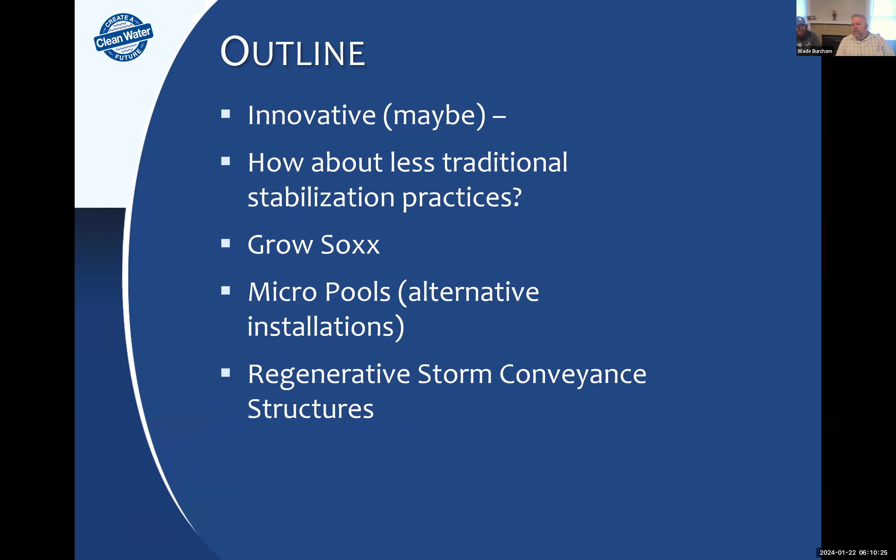A lot of these projects were funded by NFWF from that oil spill money down in Mobile Bay. I'm going to talk about three practices here: Grow Soxx, micro pools, and regenerative stormwater conveyance structures. Again, probably all of you could better present this than I can, but this is probably the thing I know the most about and wanted to present to you all.

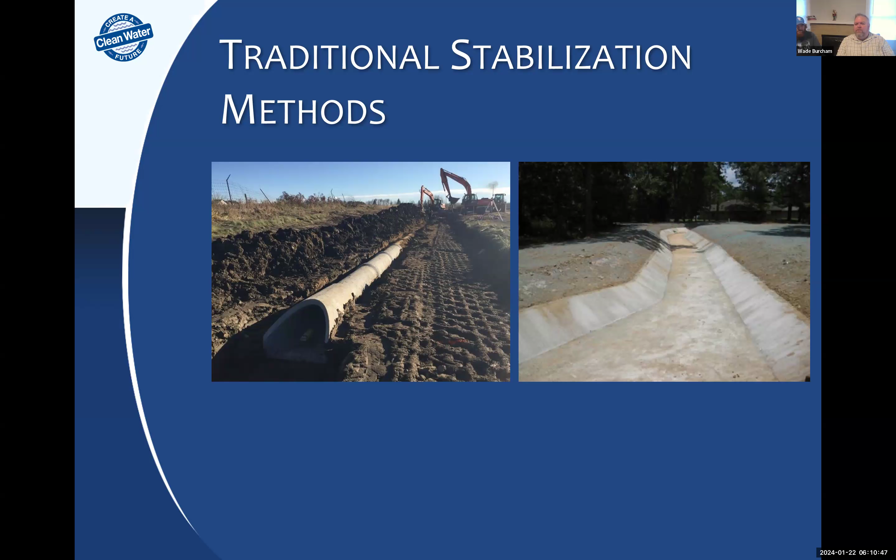We're just trying to contrast this with traditional stabilization methods that we all know - sort of the hard construction that's real strong when you first get there, but it kind of loses strength over time versus a green or naturalized stabilization.

This is a stream, and it looks really green, but there's nothing natural about it. It's at the bottom of about 2,000 feet of 100% paved surfaces, and it drops off into a golf course. In that golf course, they have the stream going around in almost circles - multiple 90-degree bends, absolutely no sediment renourishment from upstream. So this is not natural.

And they had a concrete channel that they took out. They attempted a restoration project. It failed, and so they needed something here that would fit a Corps Nationwide 27 permit, and also snake around their course. It feels like that's a big green area, you got plenty of room, but that was a very confined area due to their requirements.

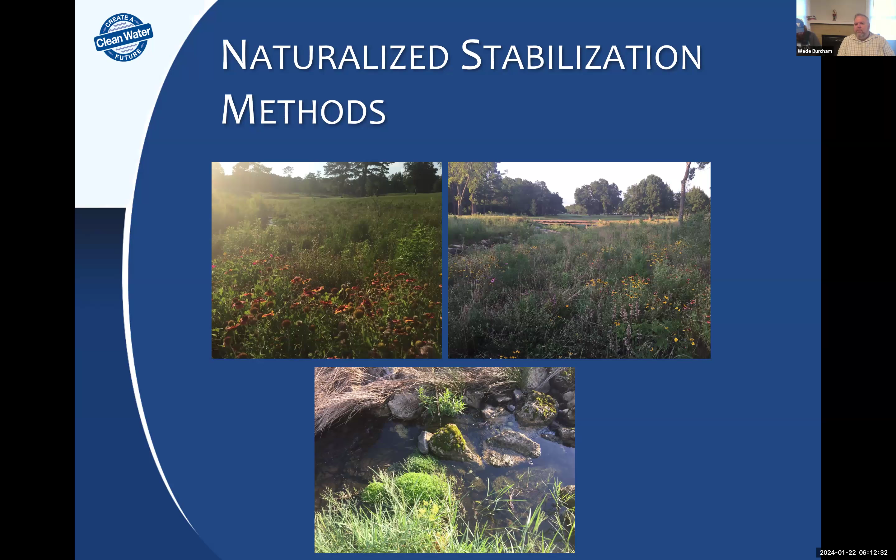And this here again looks green, but there's literally 2 tons of steel holding that thing together right there. This is all turf reinforcement mat, held in place by metal stakes - very extremely high shear stresses here. But it does have that strength of a concrete channel, yet it is more sustainable. There's a floodplain connection, it's regenerative, it grows over time, and it has that aesthetic value too.

So the traditional measures - there's a lot of good reasons to use traditional methods. One of the ones I like most is if there's a problem, it's almost never seen that if there's a failure with a concrete pipe, there's a problem with the concrete pipe, it's not the engineer. The opposite is, if a natural measure has a problem, it's not the product, it is the engineer. Just the opposite.

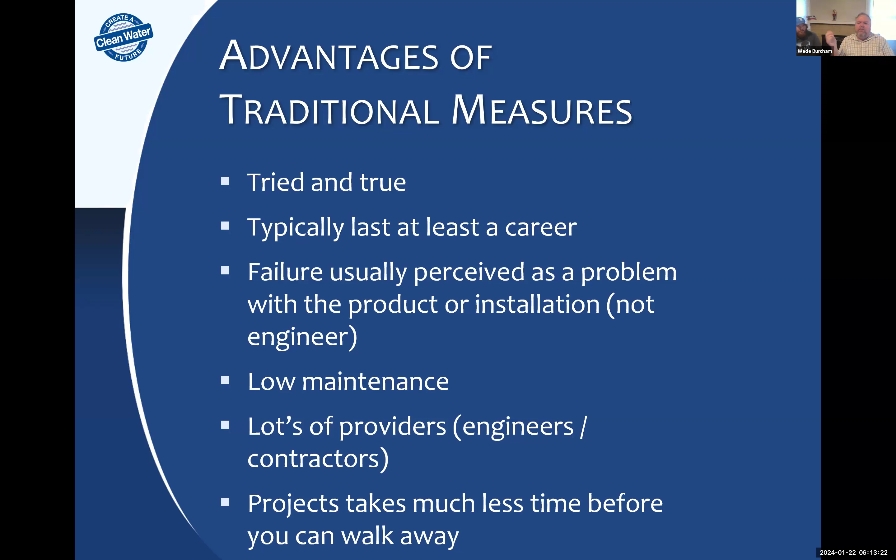And you've got a lot of people that can do these projects, it takes much less time. It's sort of, for me in this area, the standard by which you measure everything else by. So if it costs a lot, that's just how much a project costs. There's nothing to compare it with, and you get kind of a pass on a lot of things.

Some of the disadvantages, as you know, is they weaken over time. They're low maintenance, but they're not no maintenance - a concrete ditch still requires maintenance. I do this other presentation where I ask, is low impact design really low impact design, or is it just conventional engineering? Because most of the time, initial capital costs less, and most of the time it's a more desired product, but they always get you on the maintenance.

So I went around to 4 cities, and I asked them where they did a lot of maintenance - how much maintenance do you put in traditional measures versus natural measures? And I think the quote that really described it all is, hey, we don't maintain our LID infrastructure just like we don't maintain our traditional infrastructure.

So a lot of the places where I'm at, the concrete ditches are falling apart. There's more water that goes under the ditches than above them. There's actually fish that sometimes swim in between the cracks, and they fail. But again, that's not seen as a lack of maintenance - they in fact probably need more maintenance than the others. The previous picture I showed of the golf course, our biggest problem on it was trying to get people not to maintain it.

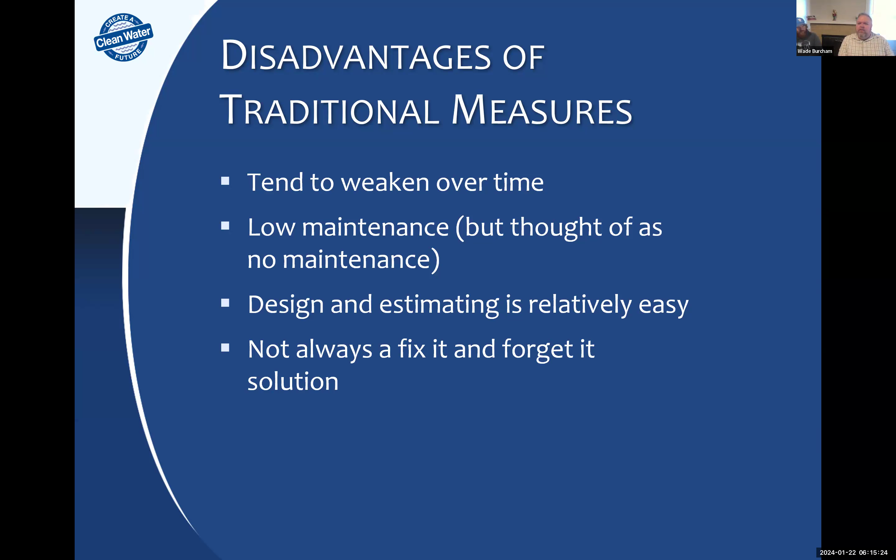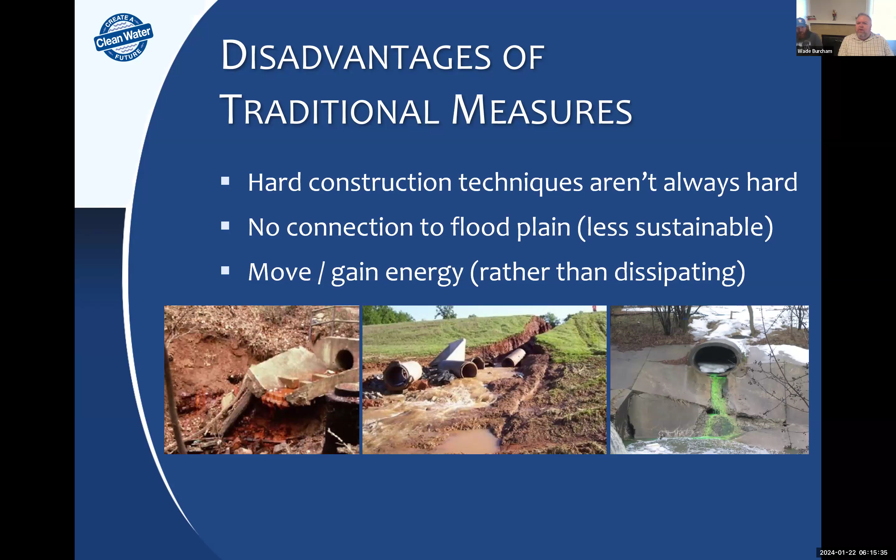They would always want to go in and cut these natural looking areas and make them look industrial. That was echoed by the cities I talked to - just training their staff not to over-maintain these low impact design or natural measures was one of the biggest problems. The traditional thought is that hard techniques are strong, but they're not - they fall apart, while naturalized stabilization measures just get stronger over time.

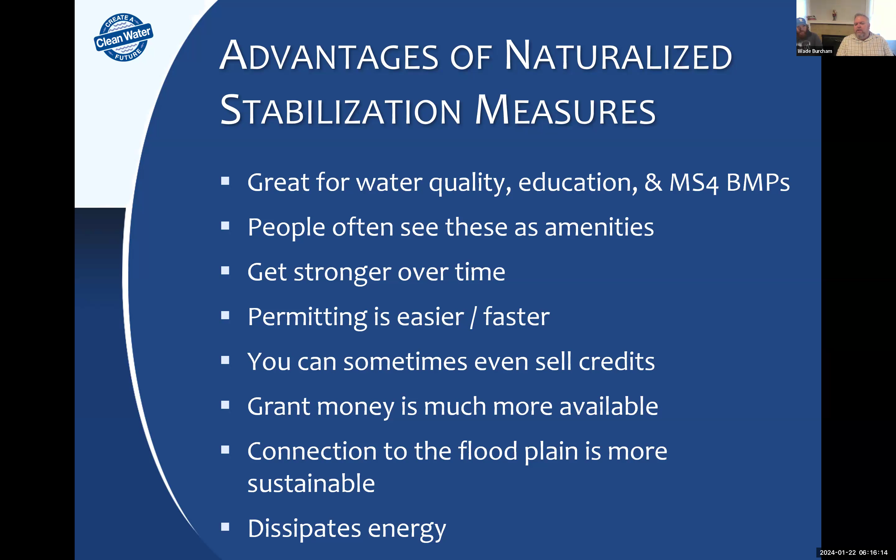You'll see two projects in here that were emergency projects - because of permitting, you couldn't have done these projects in the time frame they wanted unless you used something that would allow a nationwide permit, so that worked out well. They dissipate energy as opposed to creating it, and anytime you can get a connection to the floodplain, it's going to be more sustainable. The first product I wanted to talk about is Grow Soxx.

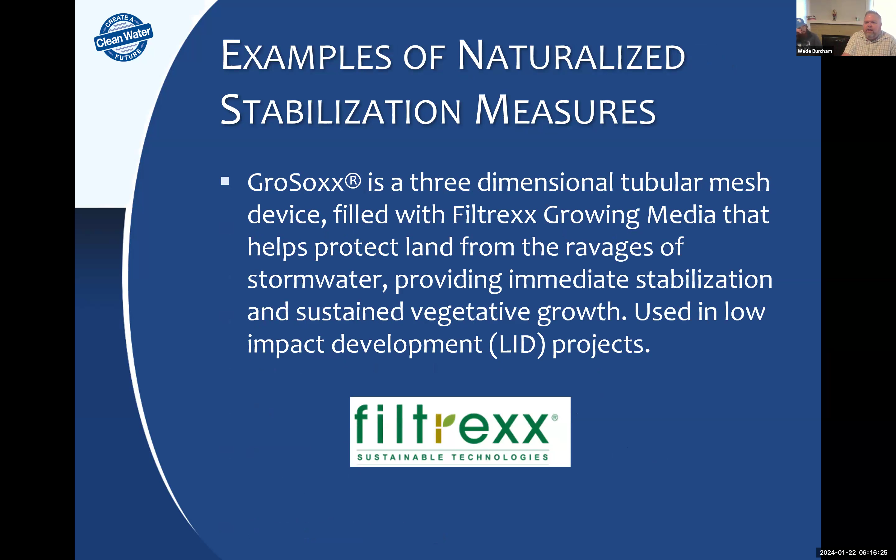It's got a long name, but basically they're just dirt bags - that's what it comes down to. This is how they're sometimes delivered, with the dirt staying in these bags. It's very good quality control - a lot of times they get delivered to the site already growing grass or beginning to, so they sprout up very fast. You can have very good quality control of what kind of seeds you put in there, and you can use these for a variety of different methods.

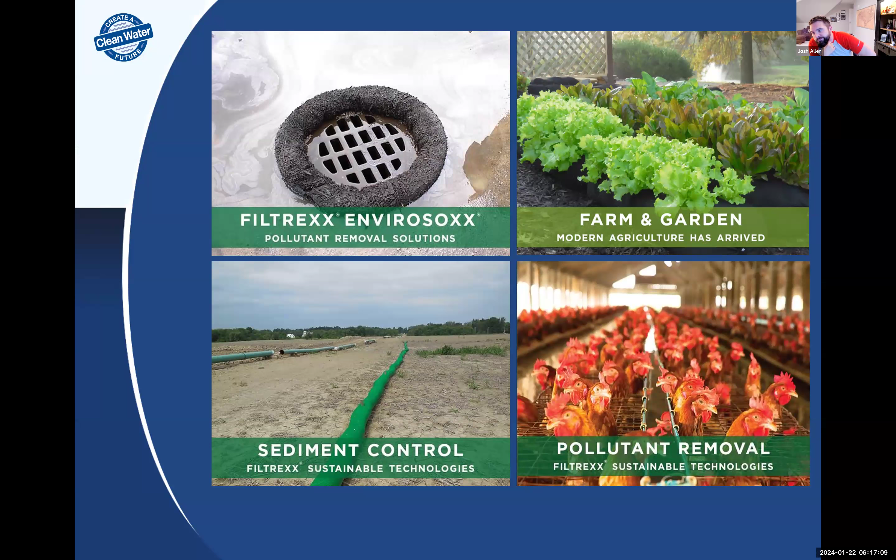Are they biodegradable, or is it like plastic? They're not plastic - the geogrid that goes back in the slope is plastic, just like you'd have in a retaining wall. The bags themselves are a fabric type material, they're photodegradable, so they will degrade over time, but it's a long time. Definitely if you have it in direct sunlight, they'll break down faster.

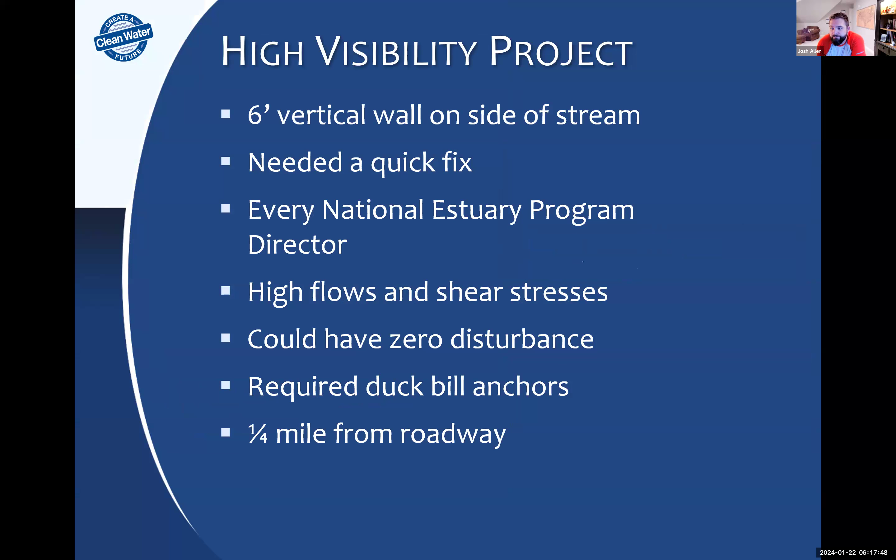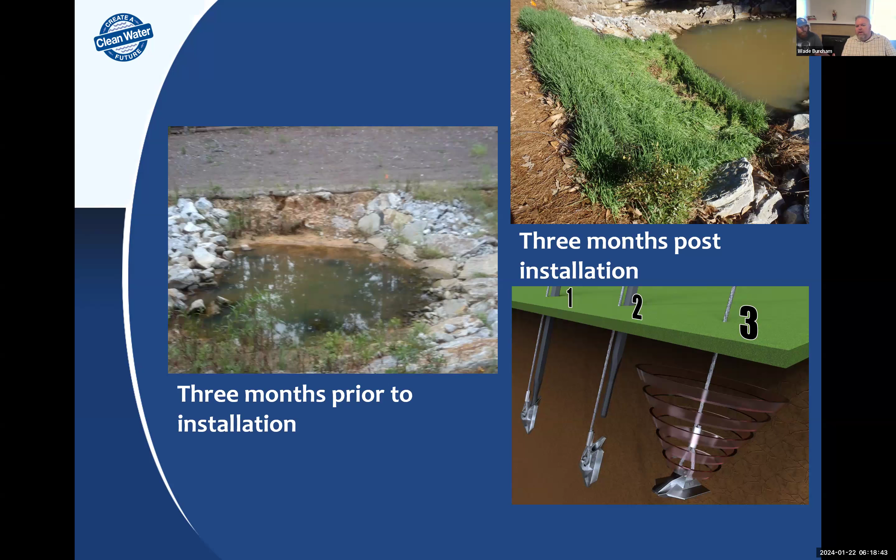This first project was a really high visibility project - just a small area, but we couldn't get it stabilized. This picture doesn't do it justice, but it's about a 6 foot vertical drop, and we had every national estuary program director in the country come visit this site, so we needed something stabilized immediately. We put in these GroSoxx - they describe it as exploding in growth - and we were able to keep them on that vertical slope using geogrid and duckbill anchors to plaster it there. This did stabilize the project, and right after this we had 17 inches of rain in 24 hours from two rainfall events. The roadway to this project washed away, but this project was still there.

This is a non-MSE wall, so if your slope can stand up and you just need stability on the surface, this is one way to do it. Again, you stack those bags in there - you can bring them in by hand, on a four-wheeler, a gator, or something like that.

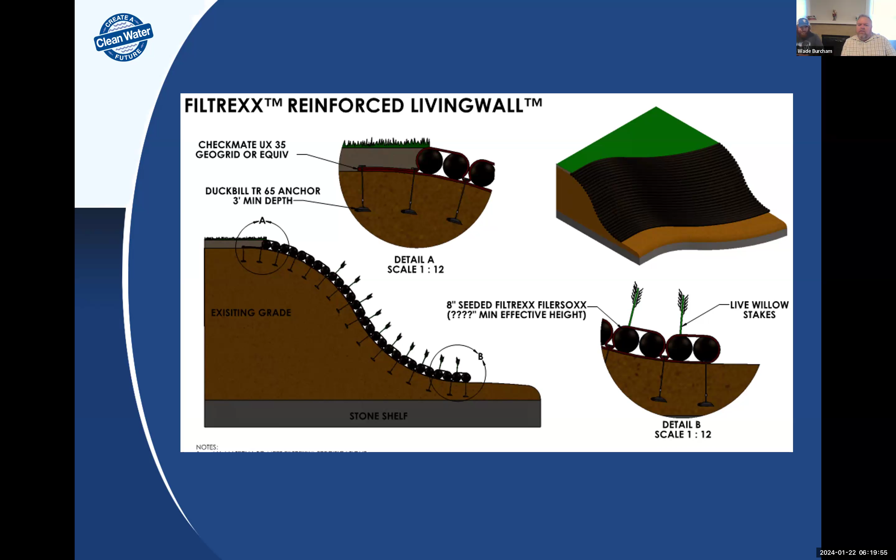Do you fill the bags on site or do they always get delivered filled? You can do it both ways, but on these projects I always get them filled beforehand. Imagine that's a considerable higher cost to have them pre-filled. Yeah, but for me getting good topsoil is nearly impossible, so that's really what you're buying - the topsoil that will stay there. Even if I could fill them on site, I probably wouldn't because I wouldn't trust the topsoil I'd get, but I do have very high trust in this topsoil.

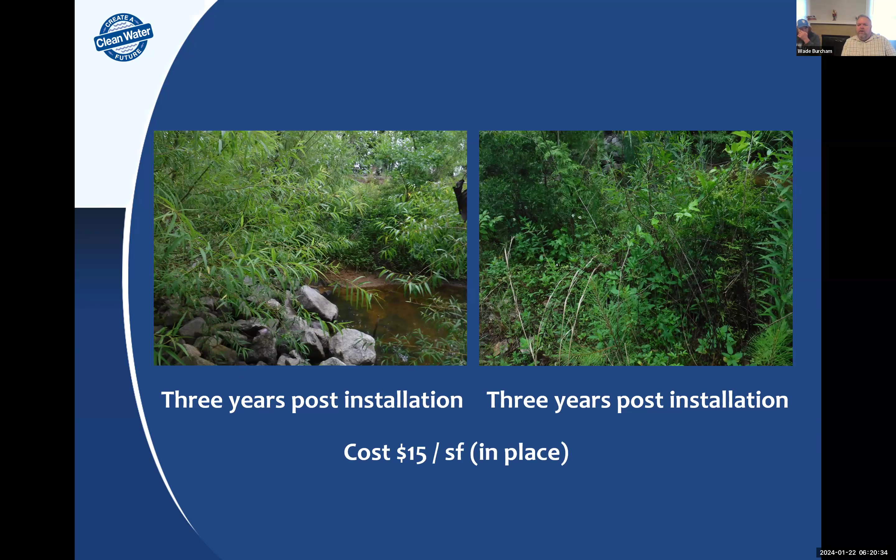So here it is post development - you can't even see the wall there, and in this state it won't degrade over time. You don't have problems with snakes getting stuck in it like some erosion control blankets do, and when it grows up like this it almost works as root reinforcement. This measure was about $15 per square foot face installed. The roots go woody down through it as well as out of it - woody and herbaceous root systems don't affect the integrity of the stabilization. No, it helps it, in my opinion.

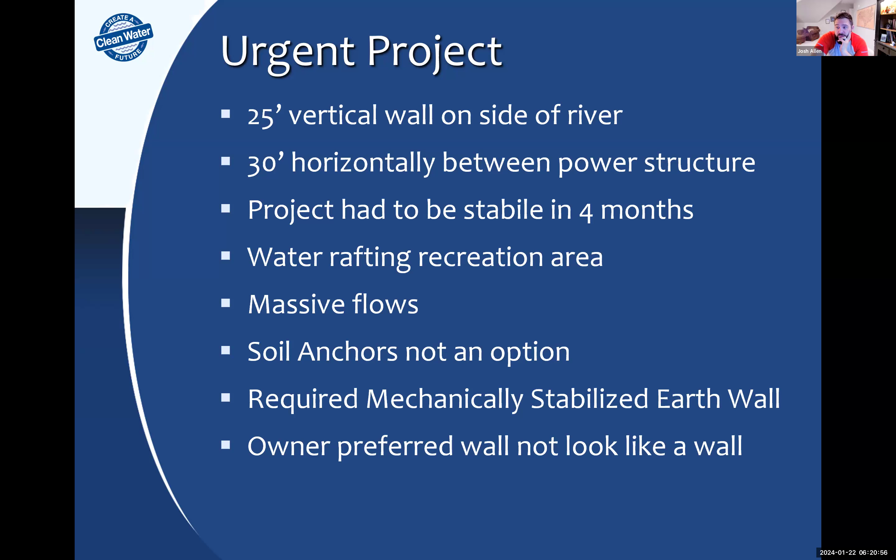Here's another project that was pretty urgent. It was a power structure that they were about to lose, they had taken it down. This was a whitewater area, and interestingly the water here varied by temperature and elevation. On a real cold day, they'd run the dam upstream, and we'd have to get out of the stream real fast.

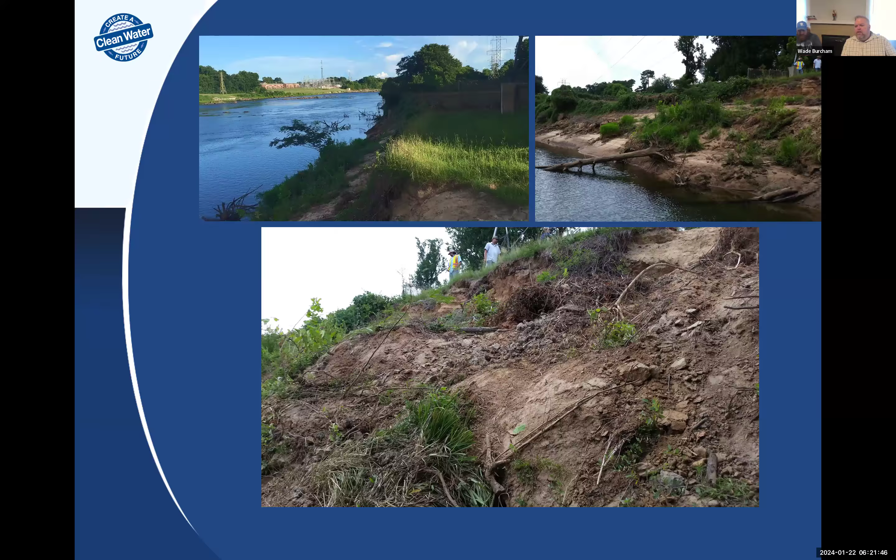This was one where we had two months, start to finish. This was low bid to have this in place. It was an emergency project, and the only way you could do it was either with sheet pile walls or something like these grow socks, and that's what we did. This was low bid, so it was not a stream restoration per se.

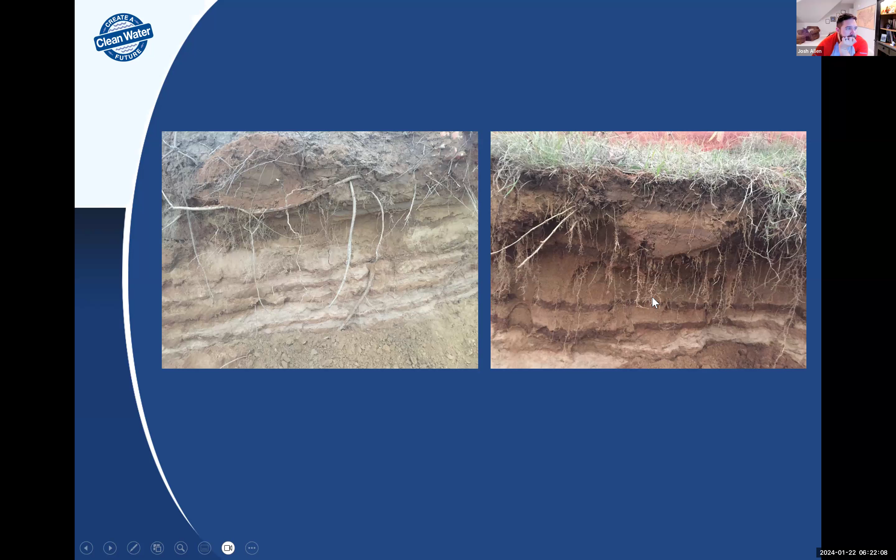Here's what those stream banks look like. Some of the vegetation on the left, you can see kudzu roots, and on the right you can see grass. So there was a lot of invasives, and you can see the difference those grass roots make versus just the tubers that the kudzu makes.

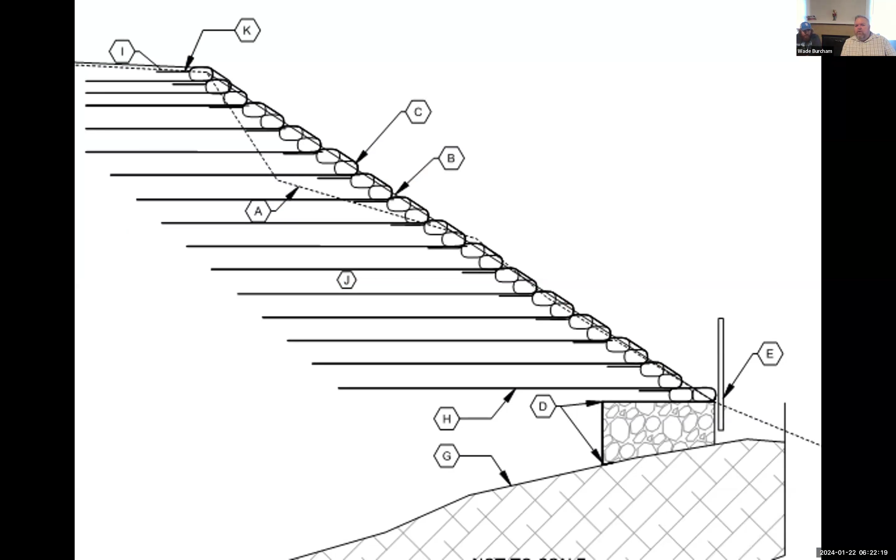Here is the mechanically stabilized wall. It was a near vertical wall, that's sort of exaggerated, but we were able to get it in very fast, and again it doesn't even look like a wall. There's nothing natural about it, but it's kind of got that natural feel to it, it's green.

I had a question - is this the utility's property, or is it someone's property that the utility has an easement on? It's an easement, but their easement is just as well as their property, they can do as they have. So is this power line the same entity that is doing the dam releases?

It is. And they got NFWF funding to fix it, right? Causing their own problem, they got a grant.

Well, what I really like is the NFWF enables them to see, in this treatment way that you present, that it's naturalized and it's trying to be a good steward. It enables them to see, oh hey, this is what we really need to be doing in these cases, and this is the maintenance for putting in and for their operations. This is a good touch point for Wade to bring these stewardship ideas, and this is my whole personal ministry with stewardship, trying to reach out to these different sectors where this is happening. This shouldn't be some small group of mystics around a campfire saying this is how we restore it - this should be something like you're showing, like you're sharing. It might not look like natural stream restoration, but it's certainly something the larger community, someone whose interest is human goods and services, can embrace. This NFWF funding is educating them, so when they do this in the future they can say, let's get more NFWF funding, or let's do it right - Wade showed us how to do it, let's do it that way. So that's cool, thanks Wade.

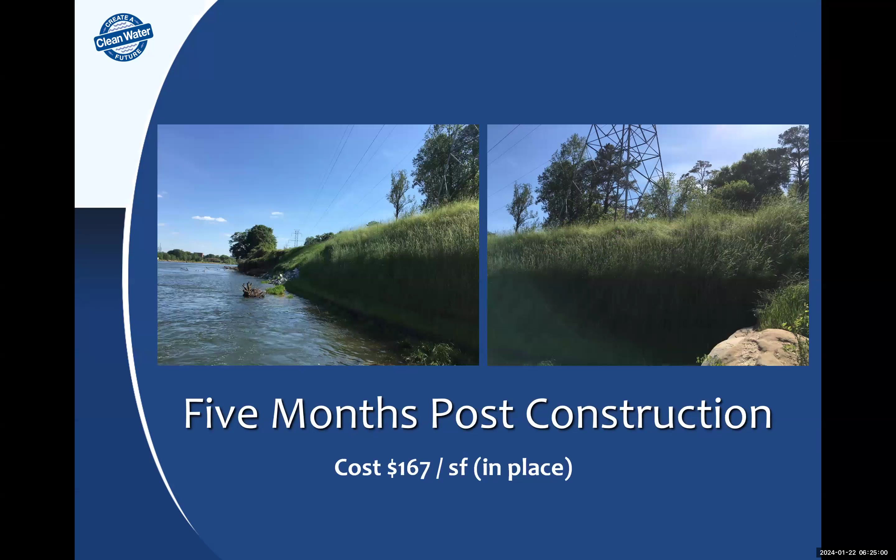$167 per square foot in place. Nice, yeah, square foot pricing.

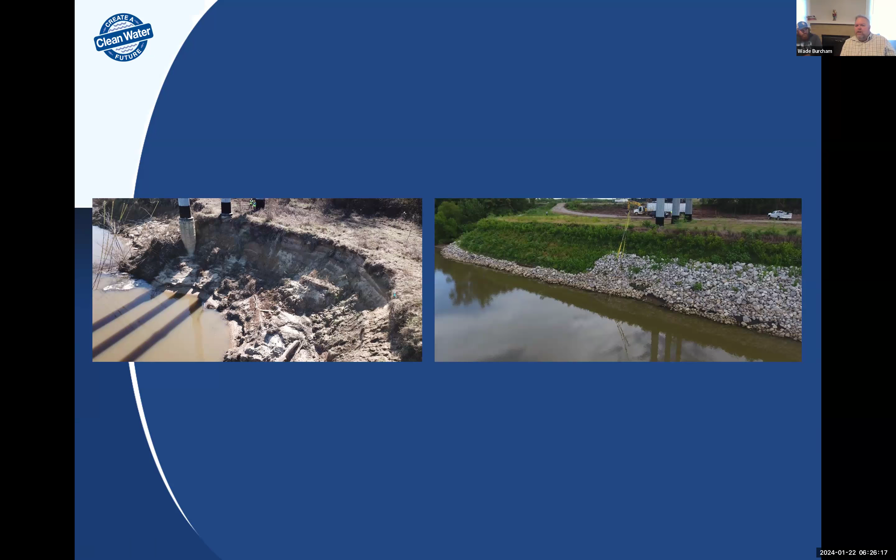And you had this one-of-a-kind power structure, you can see how scary that was getting. Again, we needed it fast, and this was an emergency. We don't care what it takes, what's your low bid, and we did this natural measure. Again, for scale, you can see this person here, though the scale is really hard to see. It was not uncommon to see a 60-foot tree floating down the river that just disappears, or the whirlpools that would develop here—just incredible.

And this was put in. This so far exceeded the manufacturer's recommendations that we really had to sell this as only a temporary thing. We were just hoping to get it through one season because it so exceeded any kind of recommendations anybody had. But it's still there today.

I don't have any more photos, but I went and checked it out a couple years ago, and the people on site couldn't believe it. They thought it was natural, so I had to go get a shovel and dig up part of it to show them this was a mechanically stabilized wall. There's nothing natural about it, but you do have the trees growing up through it.

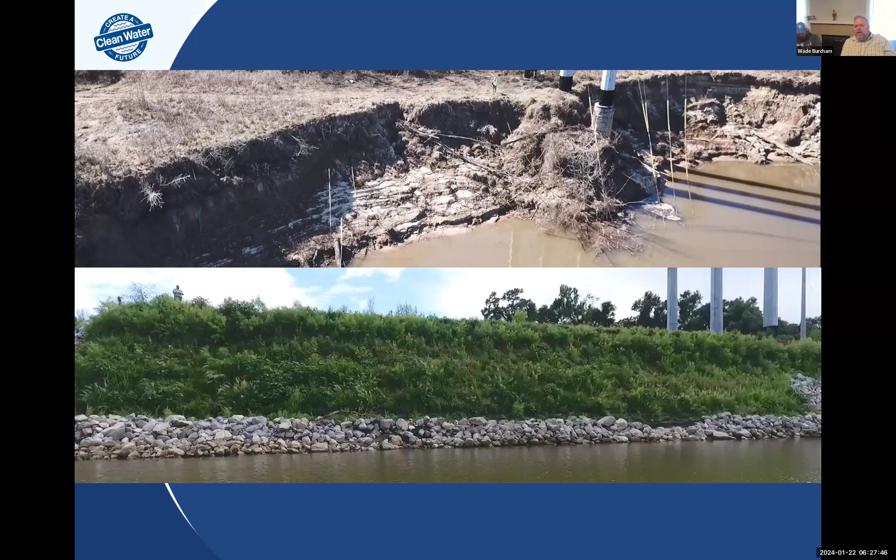The biggest problem we have here again is maintenance. The trees are growing through it, but the power company wants to cut the trees as soon as they get up, and the people doing that maintenance don't realize this isn't natural.

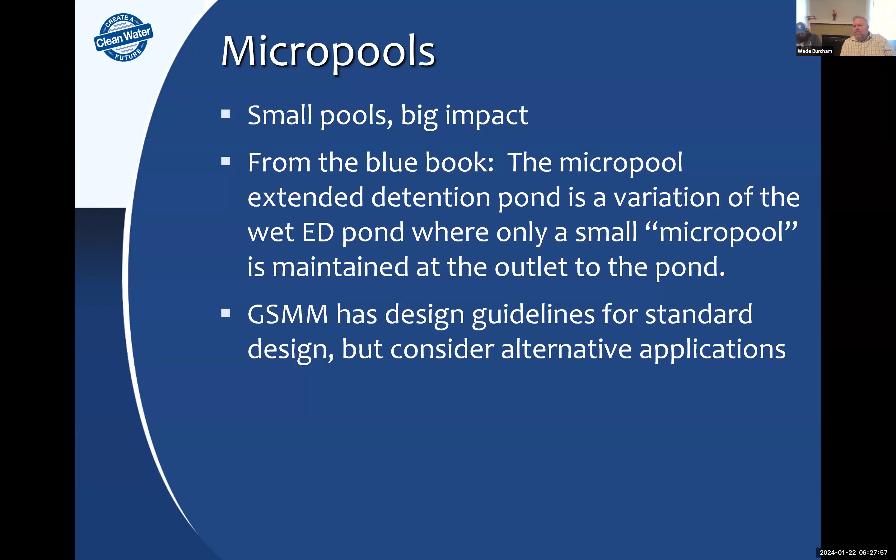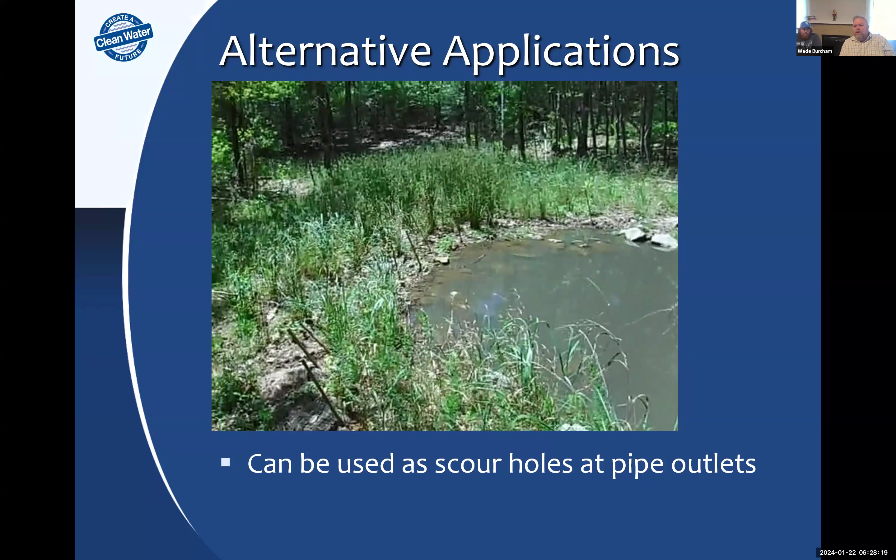Another thing I found helpful is micro pools. They're little hotbeds of ecological activity that you can put in. They provide some downstream erosion control, and in a lot of places where we have to drop pipes down steep slopes right on the edge of a wetland, we can pre-scour out a pool to serve as energy dissipation, put some juncus around it, and it's 10 times better than plain erosion control, plus it provides ecological benefit.

Juncus is my friend—yeah, juncus. Back in college, you'd put in the pipe, and then at the end of the pipe, put riprap everywhere. Now I put in a pipe, and if I do, I put juncus everywhere. Juncus can cover a world of sins.

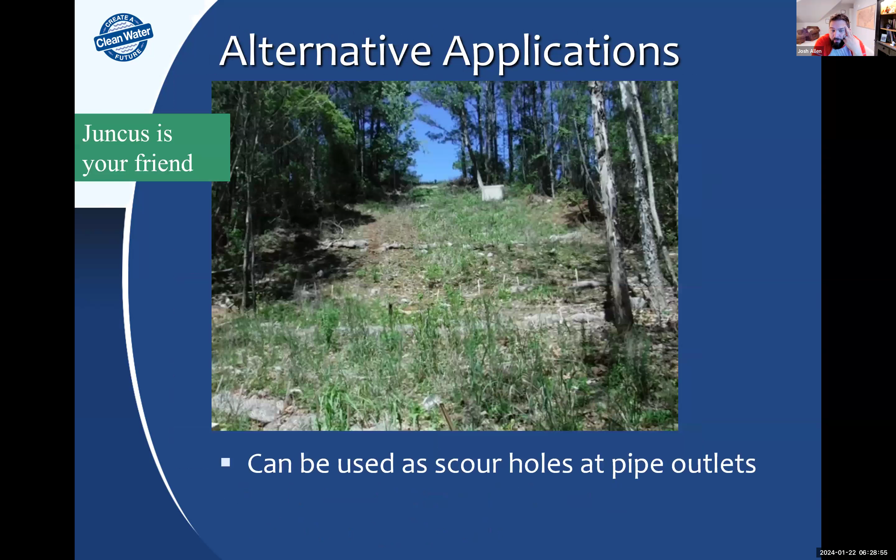I've always liked doing it where you have the outfall below your water, so your outfalls are basically unburied. It just gives it a more natural look as well, and it provides that extra level of dissipation—it's a great idea.

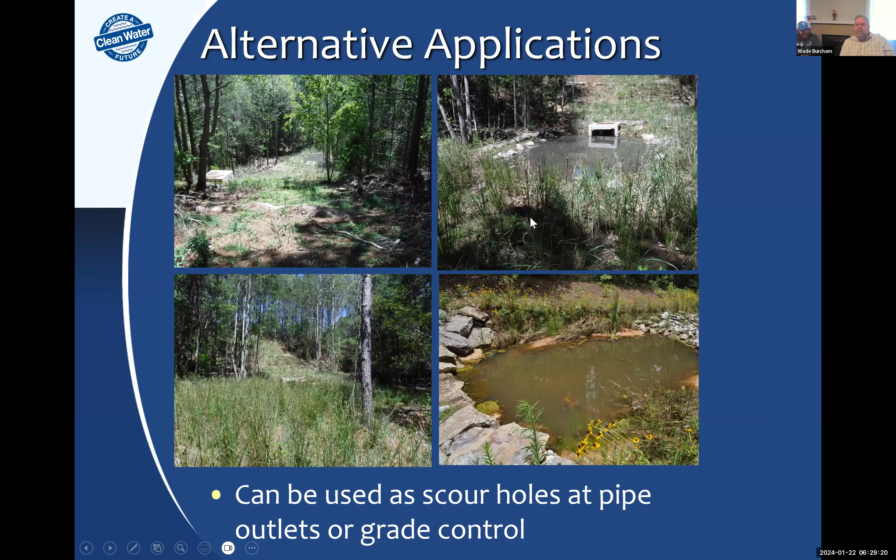A lot of times these streams are down-cutting a lot downstream, so it's actively going down. This also provides for the case where, if we do lose the stream, we're really at the area we need to be in the future—planning ahead for some problems.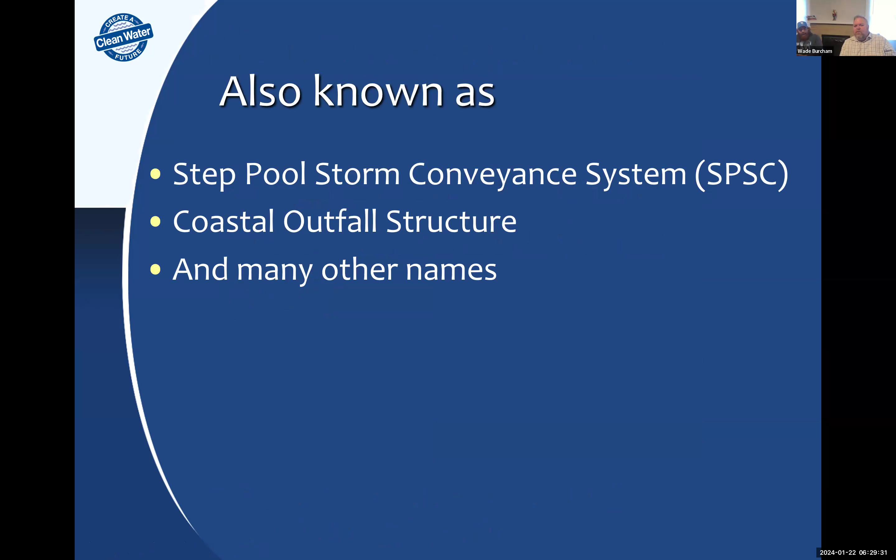So these step pools, also known as coastal outfall structures, step pool storm conveyance structures, provide attenuation, energy dissipation, treatment, safe conveyance, and aesthetics.

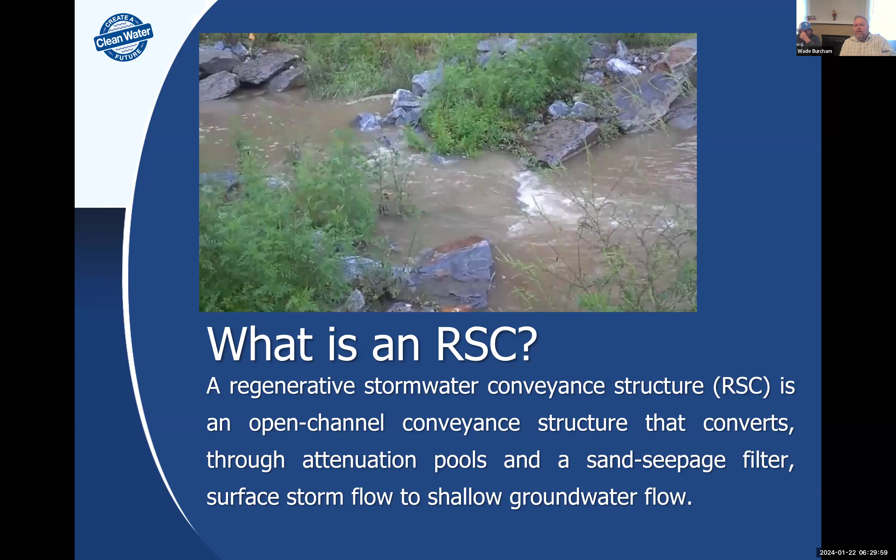That's what our version of it looked like when in place. It's kind of interesting—the people at this location where we put this in thought it was installed as a landscaping feature because it looked a bit different. They saw it as an amenity, but it was purely a stabilization measure.

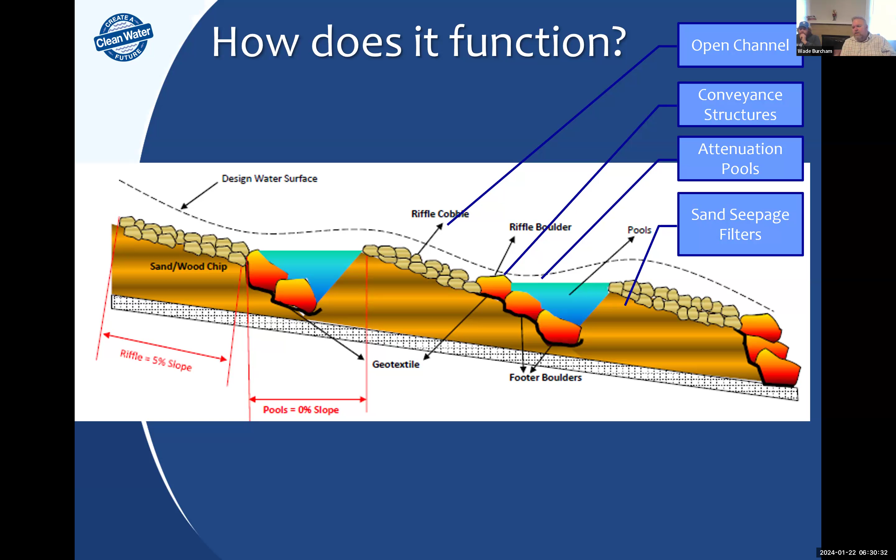And you can see the profile. You've probably seen this before, but these splashy streams provide some sand in there to help redevelop a base flow, which helps the stream almost as much as the measure itself, in my belief, because it allows natural vegetation to grow downstream more in places where it should.

Again, this is coastal Alabama, and you have these big 20-foot drops right beside a roadway, which is uncommon for us. This was a retirement village, and they couldn't keep it occupied because there was this big gully and people thought it would impact their houses. So the traditional way to fix it would be to put in a concrete pipe in the right of way.

We already had the right of way. We knew what size pipe. It was a very simple design. Problem is, now you'd have a gully, and what little buffer you had there, you'd get rid of it. These people moved here from all over—this guy was from New York. He moved down here for retirement, where he did have this nice vegetated buffer. We were going to destroy it and take out the trees.

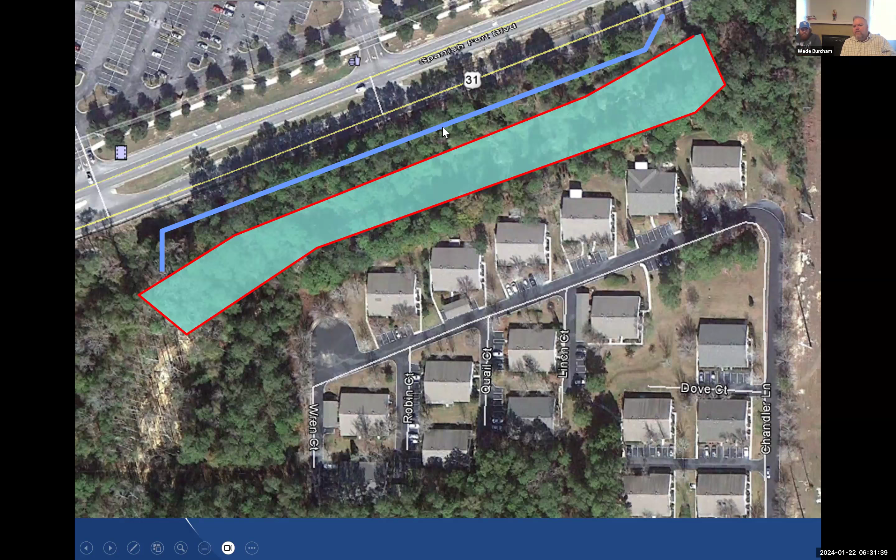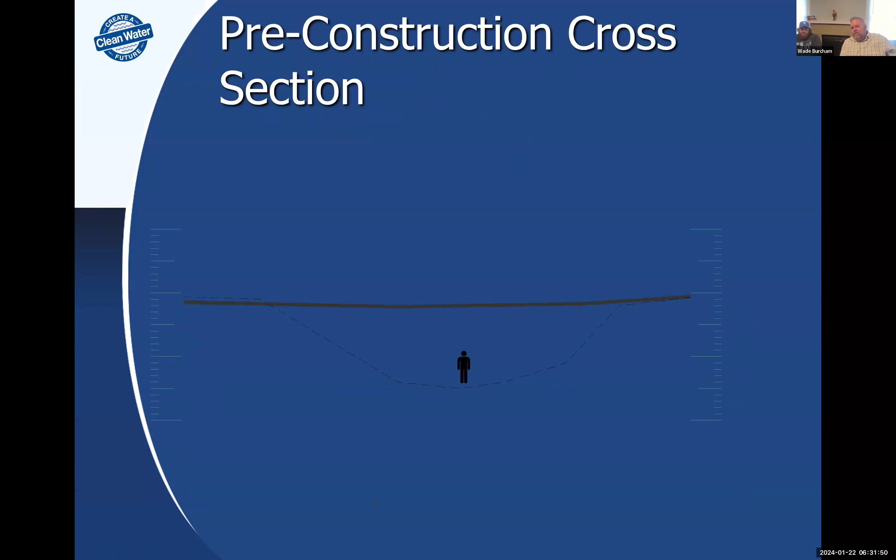So instead, we put in a step pool storm conveyance structure. The whole story about streams is they don't stay straight—they start out, and then when they down cut, you have problems.

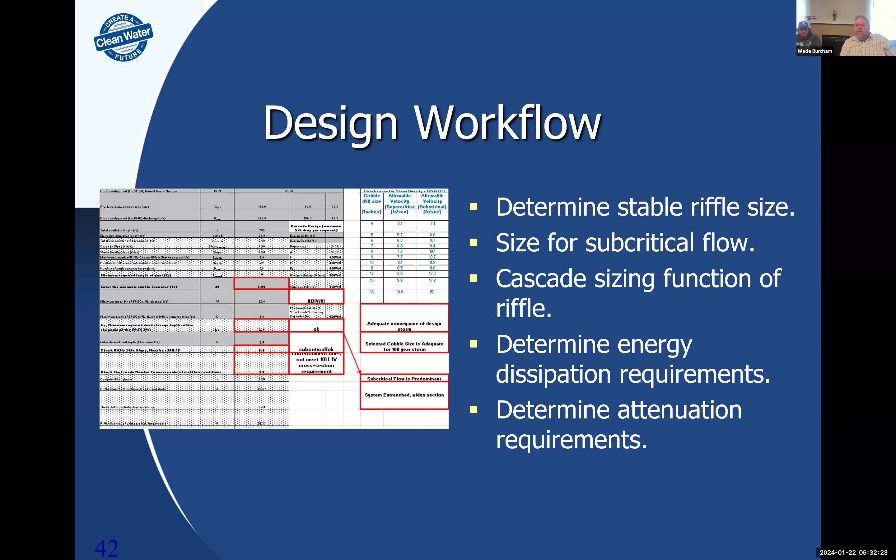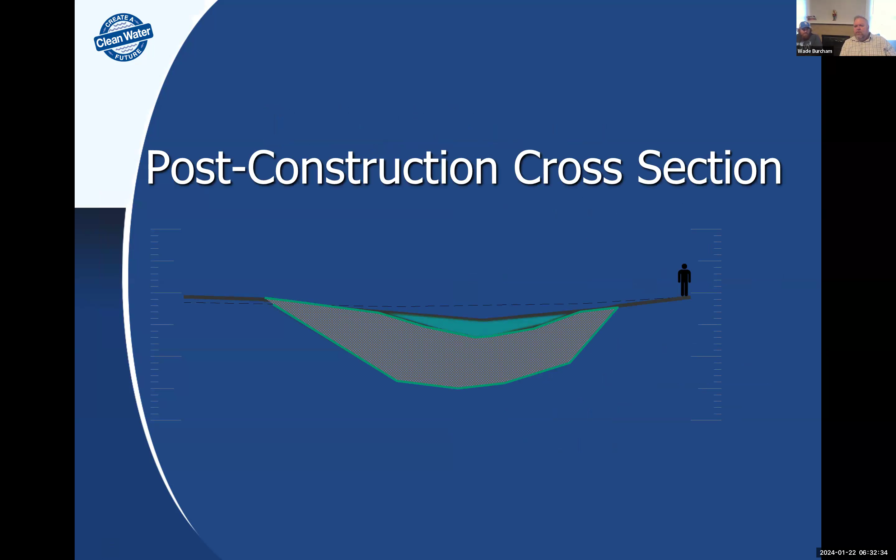But with the step pool storm conveyance system, there are some very good design recommendations out of Anne Arundel County that make people like me, who like a method you can prove works on paper—whether it does in the field or not—feel solid that this is the way to do it. It's been tried over and over again. It works, and if it doesn't, it's not because I didn't give it the best shot. There's a very definitive workflow you can follow, a standard of care that's very well documented that you can go through.

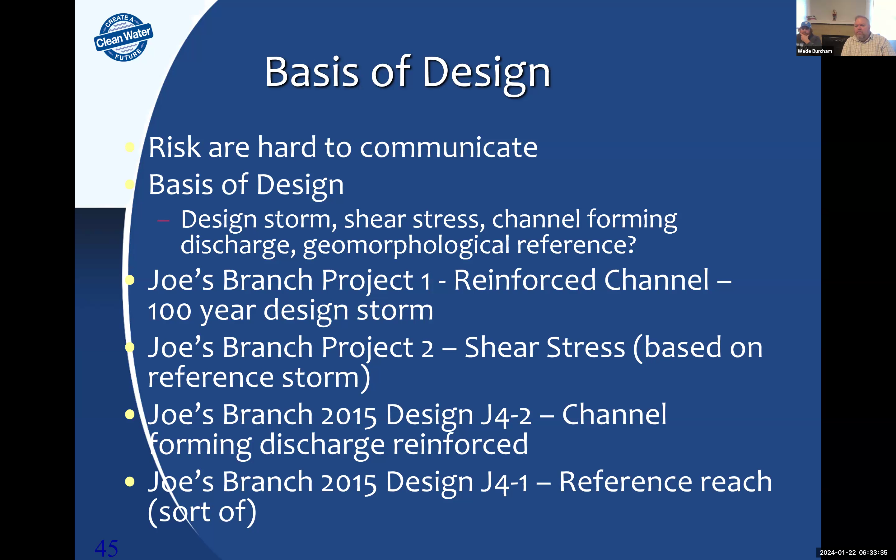But we had quite a range—everything from a reinforced channel, 100-year design storm, down to just a reference reach at about $50 per linear foot, just putting in a very minor wood grade control. We used all those methods.

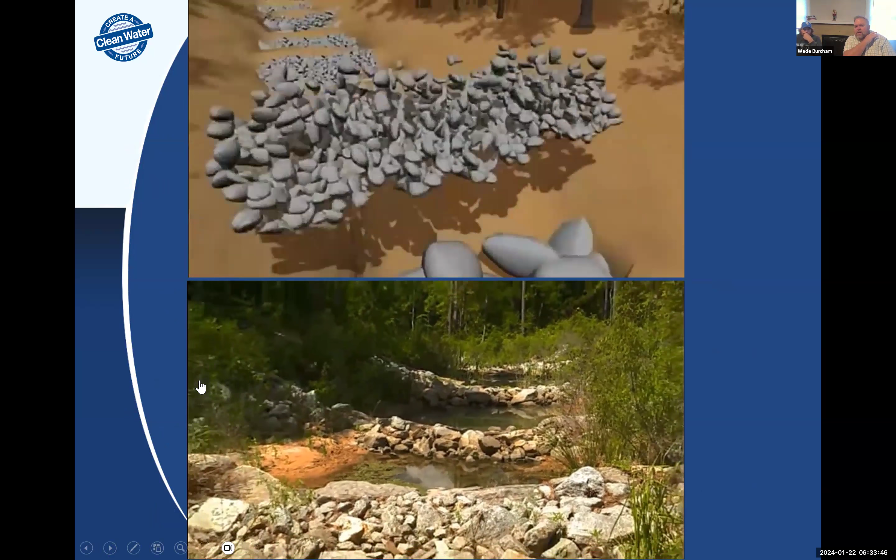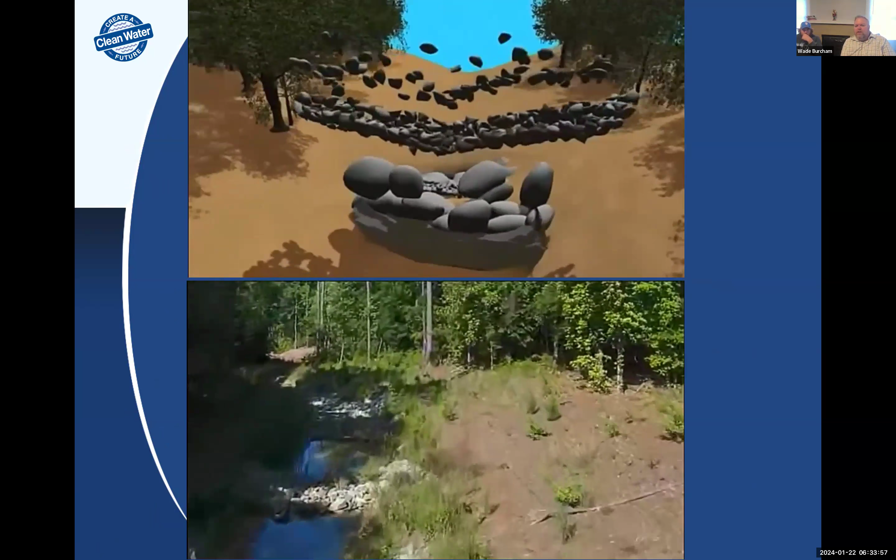Here's a bit more of an animation showing how it looks going in. Again, it doesn't look like this during construction, but you can see a bit more about how the riffles and boulders all work together to dissipate that energy. This is on about a 7% valley slope.

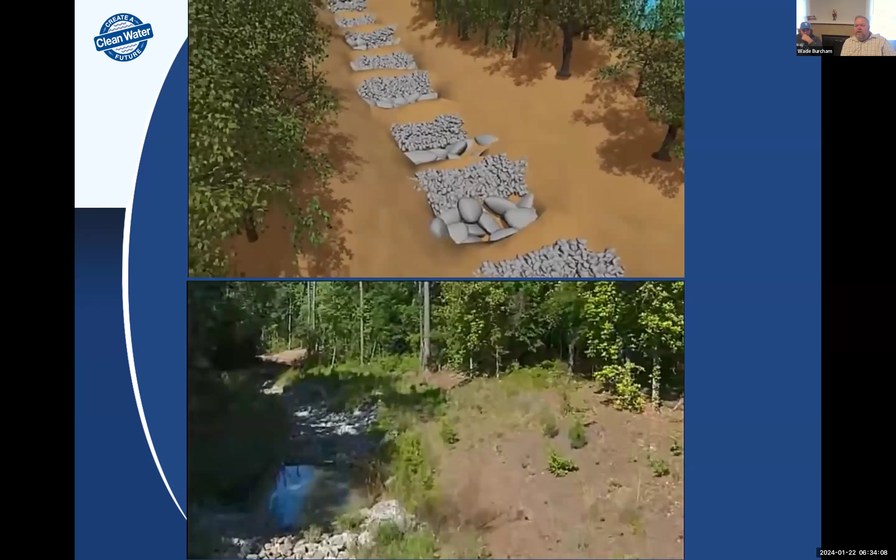And there's no rock naturally there—it's all sand and clay—so you need that rock to hold it together. That was a fancy animation, Wade. Yeah, it was. Oh, that's nice.

Here's what that golf course looked like when I first put it in. These were some soft, not-limestone rocks—sandstone is what I call them, though I don't know if that's really what it is. We were able to go back and paint these with buttermilk and moss, and it grows. That moss grows on these rocks, and the golf course just loved it because it gave that great aesthetic.

You painted the rocks with buttermilk and moss? So tell me how you paint a rock with moss. You get buttermilk, you get some moss that's growing in the area that grows well, put it in a blender, and use it just like paint with a paintbrush—you paint it on there. Wow, so you've done this a whole bunch of times in the past? Or how'd you come up with it? I've never heard of painting a rock with buttermilk and moss before. If you knew how my mind works, I'm sure somebody told me somewhere along the way, but a lot of times it's just, 'oh man, let's see what happens.' Yeah, and that's what happened—it grows on rocks.

So that's cool. How'd you keep it on there? With the flow in the channel, did you only paint the rocks above the water line, or did you place all the rocks first and then paint them, or paint them first and then place them? The painting was probably more like splashing it out there. You didn't use a brush or a rag, you just kind of threw it out there. Yeah, it was more like—I don't know if this can work, let's not spend a lot of time on it, but if it does, it'd be kind of cool.

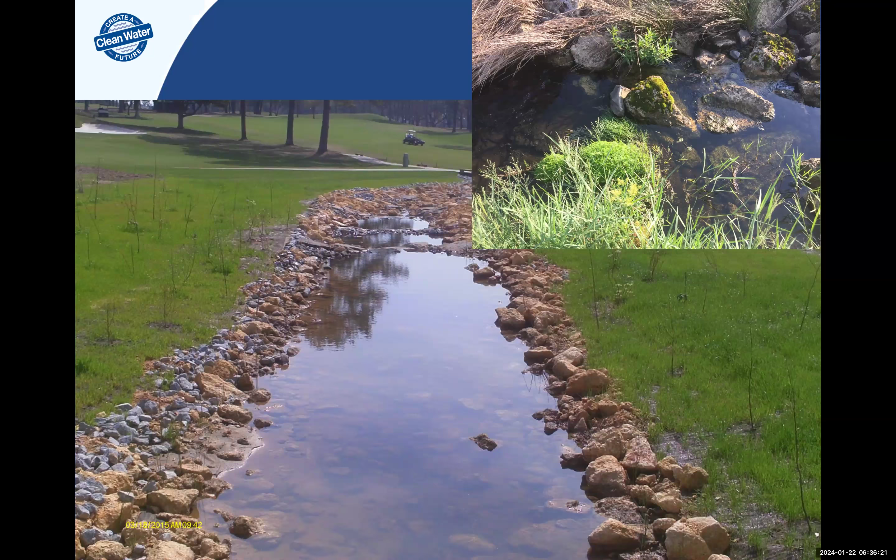We did that on our deck to try to get stuff to grow on the grout and cover up, naturalize a stone patio. Paige Baker told me she did that at a memorial site—they made a cairn for somebody and put buttermilk on it, which is a weird trick, but it works great. You don't have to feed it or anything, it just kind of lives off the rock, I guess.

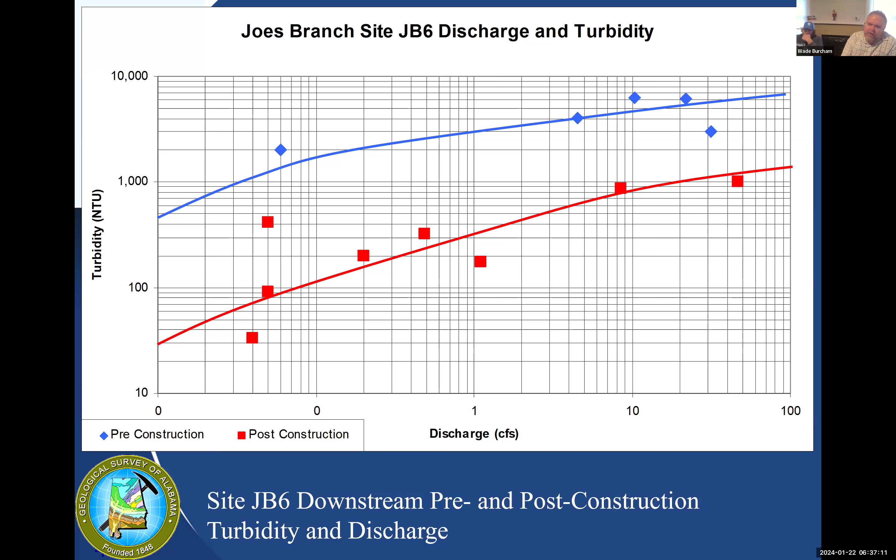Another thing about these natural stabilization measures: our pollutant of concern on this project was sediment. We had higher sediment flows post-development, but we had a reduction of almost an order of magnitude downstream. So upstream we had higher sediment flows coming in, and downstream we had an order of magnitude less—97% of suspended sediment was reduced.

This was two projects, so I was a little suspicious about these results, but we did another phase and got similar results, so I'm a bit more confident that it really worked.

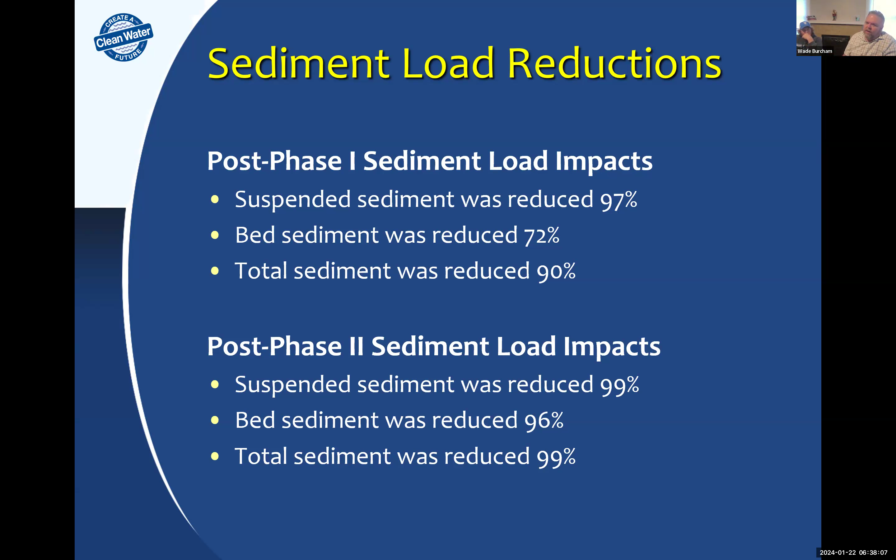We didn't have as many places using these for nutrient reductions, and we didn't get those nutrient reductions. I don't really know why that was the case—maybe we didn't have enough carbon in the sand or something. That wasn't what we were after, but you'd have thought you'd see higher nutrient reductions, though our suspended sediment reduction was great.

Did you change your backfill? Did you have anything very high in carbon for backfill? We actually didn't, but we mulched all the trees and mixed it in—we were shooting for about a 20% wood and sand mix.

So it might just be that your carbon-nitrogen ratios were a little off for the biological treatment. We used to add a little horse manure on some projects in North Carolina years ago—whenever we mulched up stuff, we'd put in a little horse manure just to get the carbon-nitrogen ratio to a point where you could get some seepage and treatment.

Of course that's a whole other thing when you're telling somebody to put that into water treatment facilities, but it would make sense.

But this was kind of the same thing, plus the wood was still sort of green at the time. I think the carbon-nitrogen ratio on horse manure, if I remember, was 20 to 1—so it was still pretty high carbon, but just enough nutrients that you could put in there to promote biological decay and give a place for biology to start instead of starting from green wood.

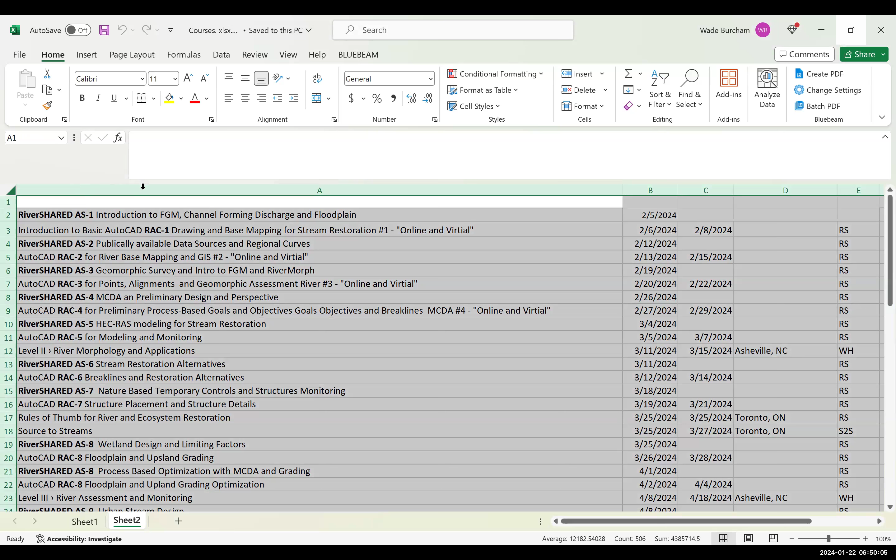What do you think drives that programmatic mindset? Do you think it's just like this is what we've always done, or is there an element of insurability and risk - that inertia from the 80s is kind of my experience.

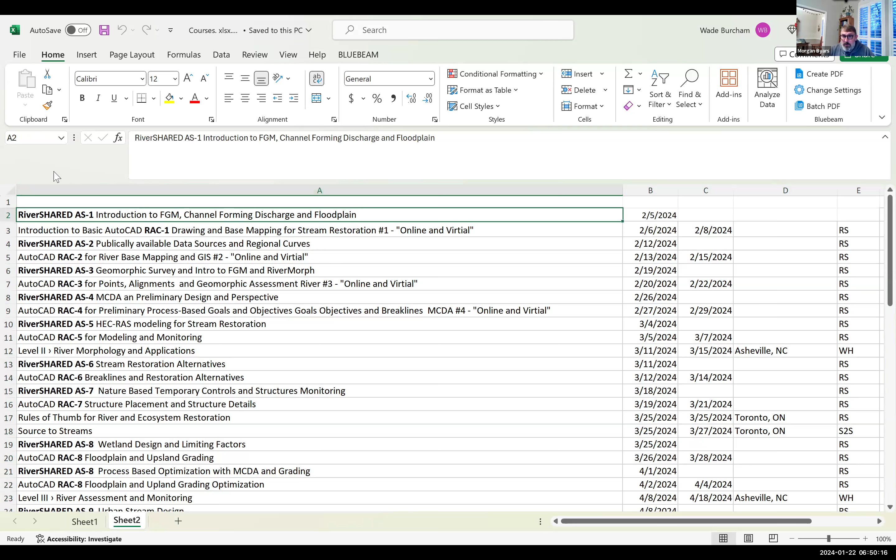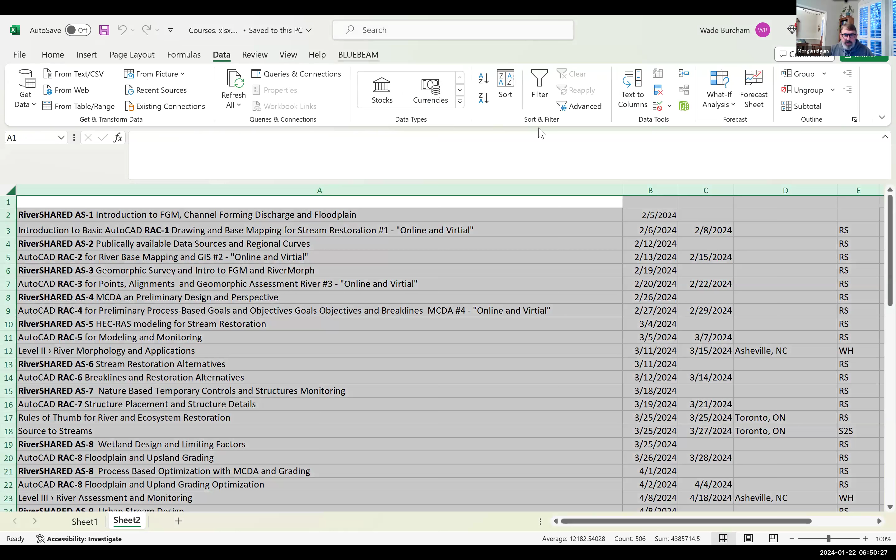Like I'm helping inventory all the mow sites in City of Austin. It's like, well, how did these even get on here? Well, somebody complained back in 1991 that there was debris in the channel. Well, our solution to that would be, at that time, get out the weed whackers and go clear it, and then it stays on the list in perpetuity.

So I think a lot of it is just inertia, and it takes somebody inside wanting to be proactive and reevaluate those practices. But it happens at a programmatic level.